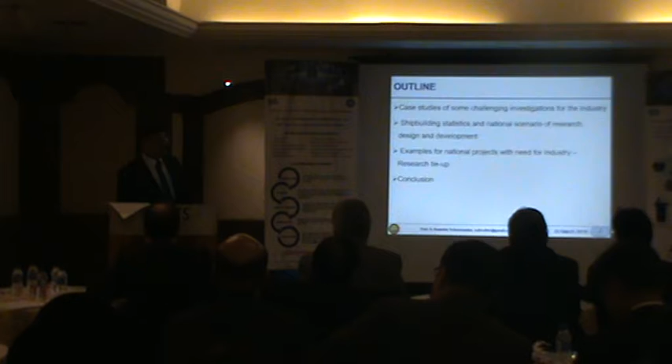So in my outline, I'm going to do two or three case studies, time permitting, and I hope it will fit within 20 minutes - I will do my best to do that. I will then touch upon the national scenario of research and maybe sum it up with the conclusions.

So the case studies I have taken, it's important to emphasize that these are all very international projects. I picked the projects where we have international clients from very developed nations and dealing with very real problems. The problems happen to be, because these are very recent, just concluded, or some are still ongoing projects,

which are related to the FPSO, that is the floating production storage offtake system - the large ships that are there in the production fields, tapping oil from the bottom and doing some primary processing and then sending them off in motherships to destinations. So, let me get on to the first case. What do you do?

Okay, yeah. The first one is how we have simulated the astern pull-out. The ship is operational in the Gulf of Mexico, and there is the tower yoke mooring system, as you can see in the picture on the right, where it shows a tower which is fixed there, and then you have the pendant and the mooring arrangement.

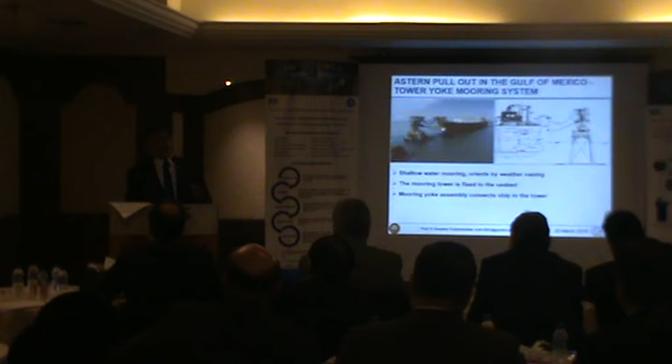I'm sure all of you are aware of it. It's a wonderful tool that has evolved over the last 25 years. But the important thing is how to use it properly, because often you may be giving wrong inputs, making wrong assumptions, or bringing in simplifications, since it solves a complex set of equations with mind-boggling numbers of millions of cells and hours of computer running. So it's not simply an animation coming out—it's hard number crunching after several days of running, which produces results that also need validation.

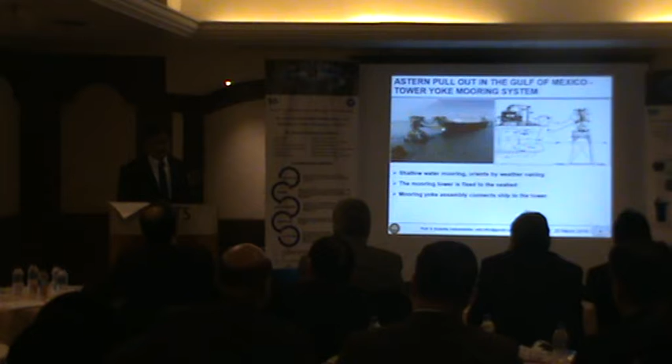So what we are showing here, I just want to describe the basics. This particular ship is in 30 meters water depth, and because of weather vaning, it will always orient itself to the line of least resistance from the wind and the waves.

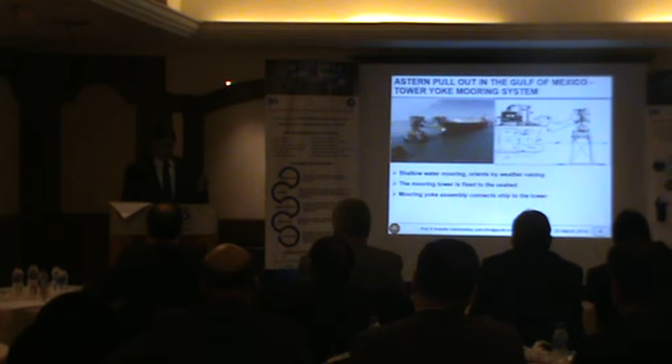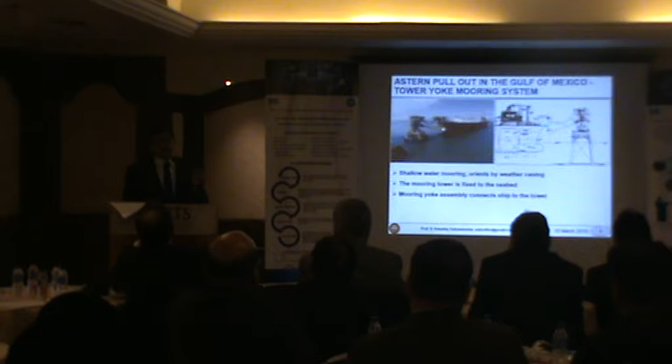And the mooring assembly connects the ship to the tower, and that needs to be detached. The detachment comes by exerting the astern pull, which, if strong enough—in this case calculated to be 70 tons—so if 70 tons of astern pull can be obtained from the propeller within the available engine power, then it can detach. So we are simulating that.

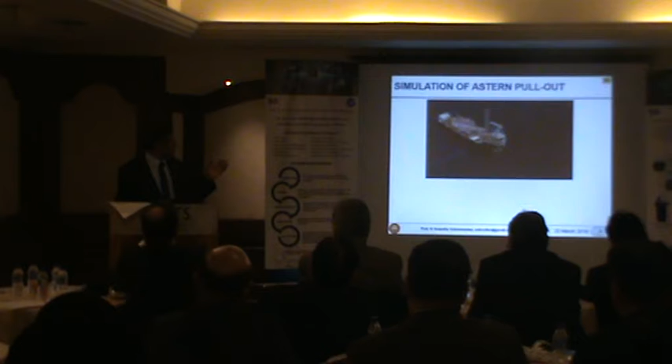This is simply an example of what weather vaning means—as the wind blows from one side, the ship will orient itself. That's what naturally happens. But when it goes beyond a limit, we have to do the astern pull out.

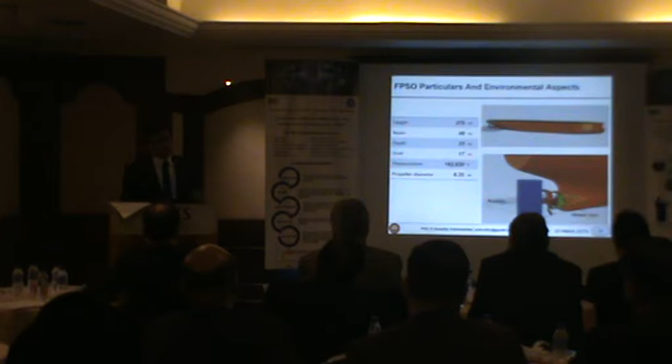So this is the modeling part of it. I'm just showing the very superficial things in the simulation, as we call it. Here you have the size and form of the ship, and you need to simulate each and every detail there. In this case, besides the rudder, there is the propeller and the Mewis duct. The Mewis duct is a device which will homogenize the flow to the propeller and improve its efficiency.

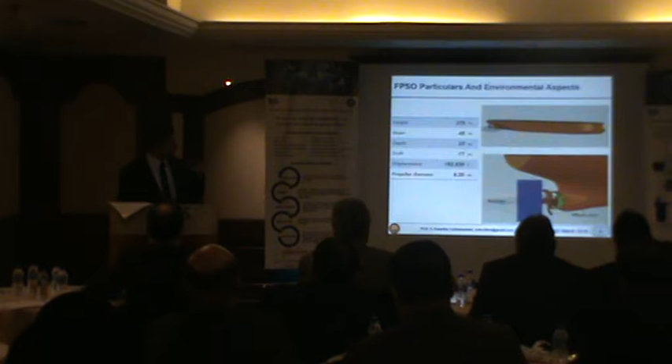So all these have to be simulated, and next is what comes out of the number crunching. Typically, we use these commercial Reynolds averaged Navier-Stokes equation solvers. The method used I have put there.

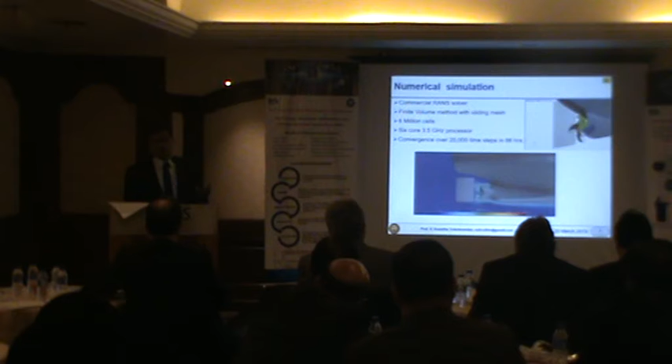There is a complexity of making the propeller turn within the domain, what we call the sliding mesh—the millions of cells that are used, just the description of the system where it uses 6 cores. In fact, people use even 100 core processors these days. And for one velocity simulation of astern pull, it could take as high as 86 hours.

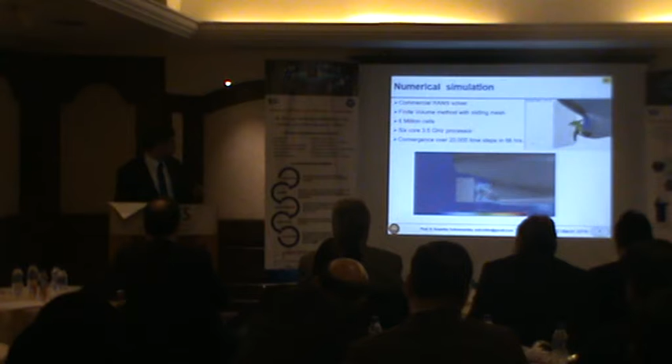So it is the result of that that you see here at the bottom—how, as the propeller rotates in the mode, the flow takes place, and then you derive the thrust out of it.

Now this is simply to say what results come out of that, and as I said, we have just delivered these results to the client, and we have verified that it is possible to do it. It is simply an example of how a very complex problem could be resolved.

Mind you, to handle these programs, to reach a validation stage, to have a degree of reliability, it takes months and sometimes years. This particular project we have been doing for the past few months. But what I mean is it requires a lot of experience and insight, so that somebody can trust the numbers that you give.

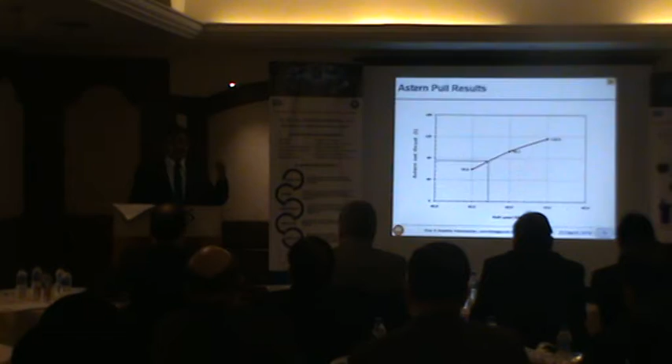So it's just one aspect of how industry and academia or research institutes need to work together. They are the experts in handling the ship. We, again, with humility, have the knowledge of the fundamentals to be able to resolve the problem.

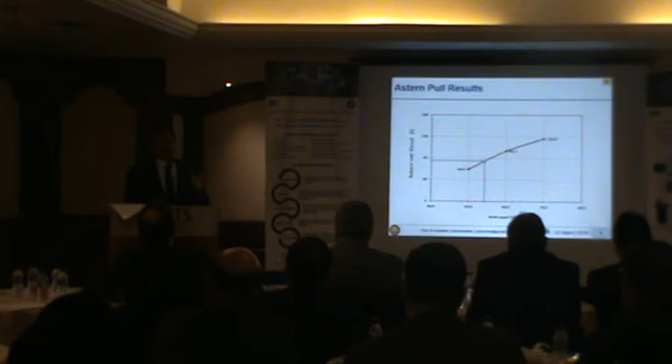And this is the very basic aspect that one has to keep in mind when we talk of research. I say this because, on an average in India, research is usually taken to be something useless. I say this because people think, oh, he is doing some research.

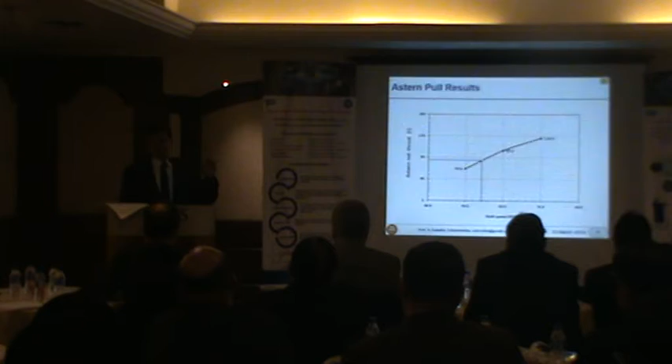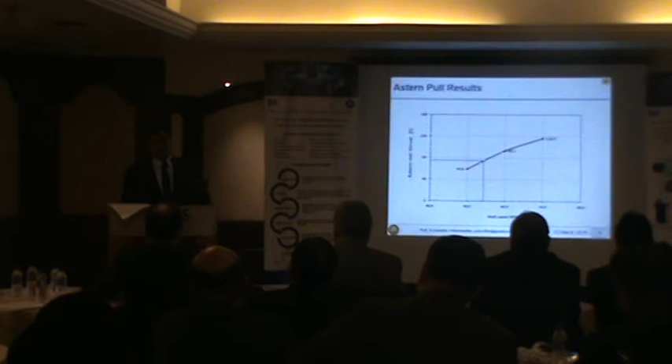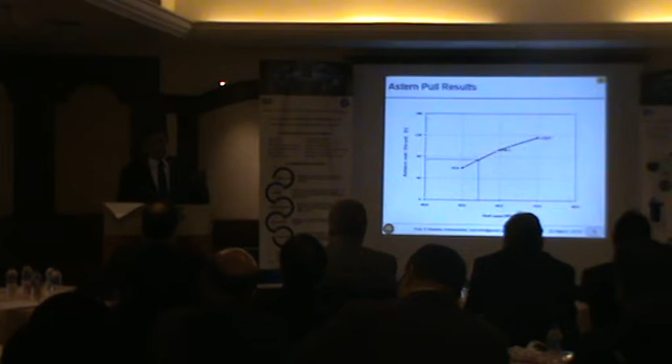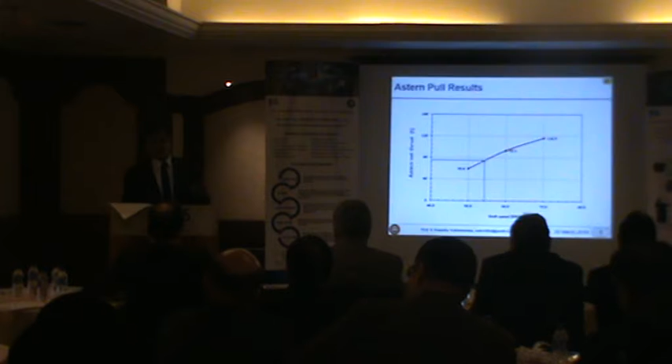I understand why they say so, because they feel what is tangible and what is being done is the real thing, the other thing is all in the mind and on paper. Maybe at higher levels it is not thought so, because this affects how we look at it in India. We need to cultivate true understanding, belief, and mutual respect, to learn to solve our problems. Research is not something exotic or meant only for a certain level of people. Research could be generated almost everywhere, every shipyard, every design process. I'm just trying to bring that out as an example here.

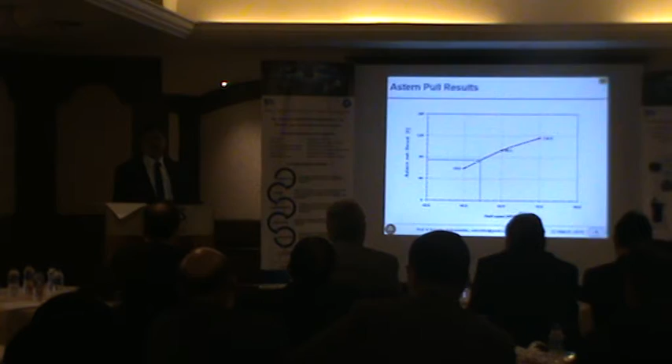This graph shows that at a propeller RPM of approximately 55, this engine's propeller, absorbing 14,000 kilowatts of power, can deliver 70 tons of bollard pull to pull the ship out.

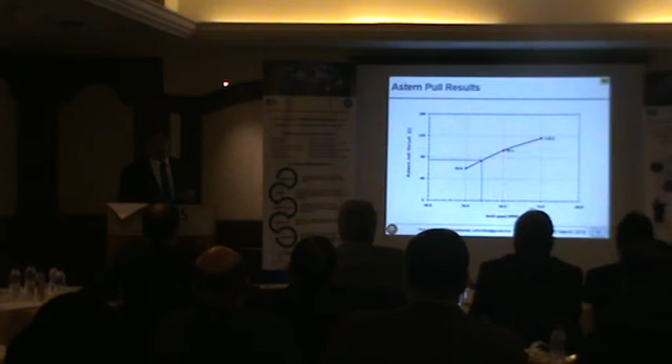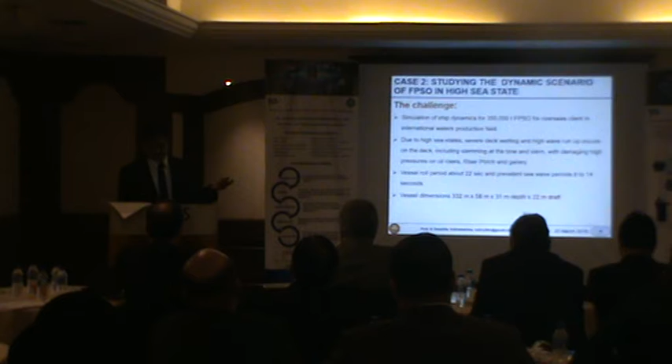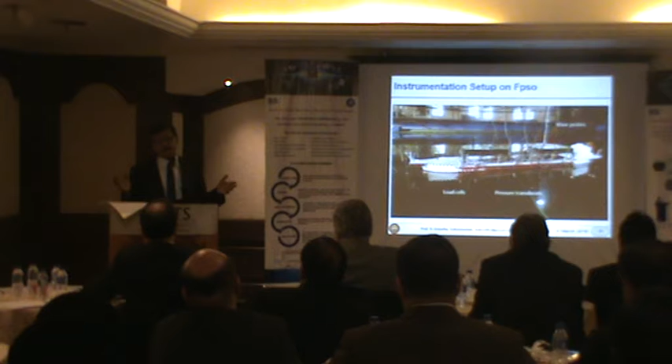This is what we have actually physically done. This is not simulation, this is physical simulation, in what we call the wave basin facility, a laboratory-conditioned system where we recreate the sea, and the ship has to be made to a model scale. In this case the model is 5 meters long, because the ship is a 330,000 ton displacement vessel with a beam of 58 meters, a depth of 31 meters, and a draft of 22 meters. You are seeing the freeboard here, representing 9 meters.

You have to understand the problem here. What you see on the side of the ship, the red structures, are called the risers, for taking oil from the bottom. This ship has a peculiar arrangement where the risers are on the side, with the riser porch on the lower portion and the riser gallery on the upper portion. All these structures are subjected to the vagaries of the sea, and experience shows many of them getting damaged or thrown out. This study came out of the necessity to understand and find the forces and pressures they are subjected to when big waves run up on the deck and impact these elements, so the design can be handled correctly.

You can see the maze of wires and the number of instruments used - more than 20 transducers, a number of pressure transducers, load cells, and what we call run-up probes to measure how much water rises over the deck every time the big waves splash. This is an actual event taking place there all the time.

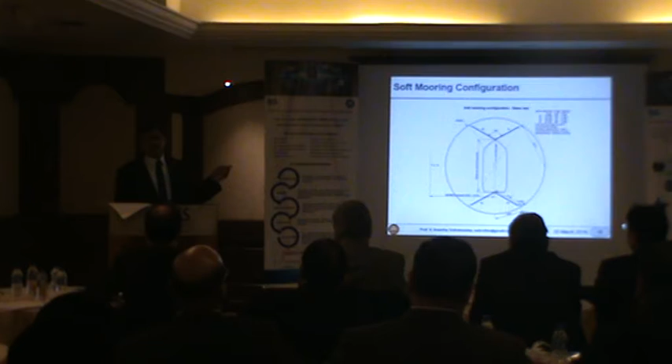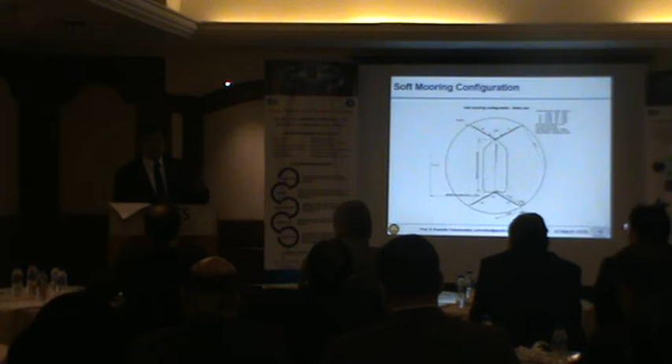There are also requirements that when the ship is out there, you need what is called a soft mooring system - I won't describe more of that. It allows the ship to execute its oscillations without interfering with the natural period of those oscillations. It should not be invasive, yet it should still keep the ship in position, otherwise it will drift away, which is not a realistic solution.

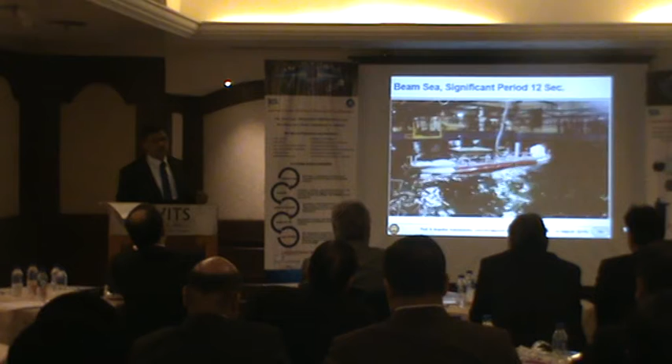Here is the video showing the actual generation of waves of sea state 5 or 6, done in computer-controlled mode, and you can see how the waves get tossed up. Of course this is a model so the period won't relate directly, but there's a way of scaling it up using what we call Froude's law - let's not bother about that now. What we need to see is that in such a condition, every time a wave is tossed up, a few meters high waves go over the deck.

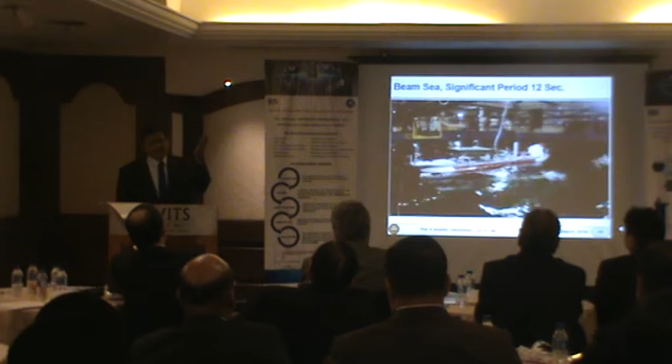And therefore the dynamic pressure can be as high as 12 to 15 bar. You can imagine the impact with which it slams on the structure, and that is also why many of them were getting damaged and thrown around.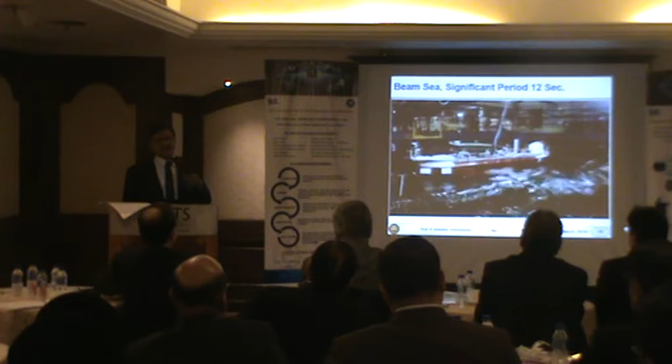If the experiments are carried out well with due diligence, the preparation of the model takes months, because it is supposed to simulate exactly the way the ship behaves. That means your mass distribution, your mass moment of inertia characteristics, your GM, all these things, and also the most important deck structures, all have to be simulated, because they are all going to play a part in the results you get.

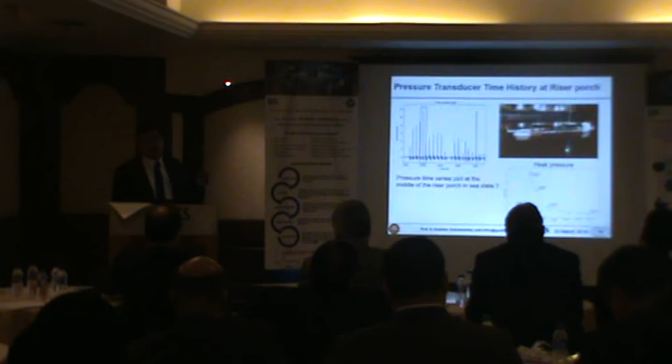Here are some of the results, just typical to show. You can see how the pressure shoots up. All those vertical lines are momentary high peaks of pressure. That means at an instant of time, there is a very high pressure peak, and the right side lower bottom figure just shows that although it looks like a single peak, there is a high peak and then it quickly descends to a low value.

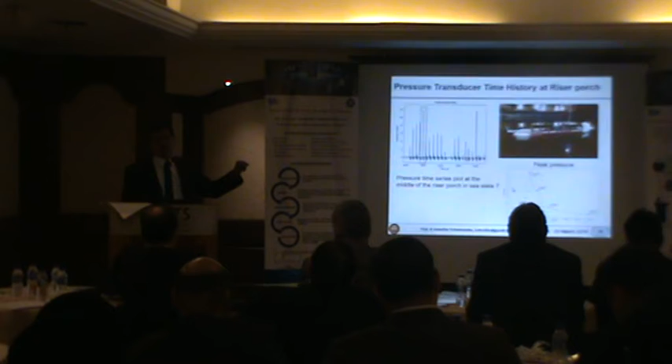So the question is, can you really design for this 15 bar pressure? If you go by structural principles, you will have to have very high scantlings. I can only say this is analogous to if somebody gives you a slap - momentarily you face a high pressure, but that didn't kill you. Still, there is a possibility the structure can take that pressure momentarily. So the design principles are different. What is the average pressure you get over the period, and can it sustain that? Because otherwise it becomes impossible to design the structure if you report this is the pressure you are getting.

You understand? So there are a lot more ramifications in these things, but the interesting thing is this experiment gave us wonderful insight into something which we ourselves did not expect.

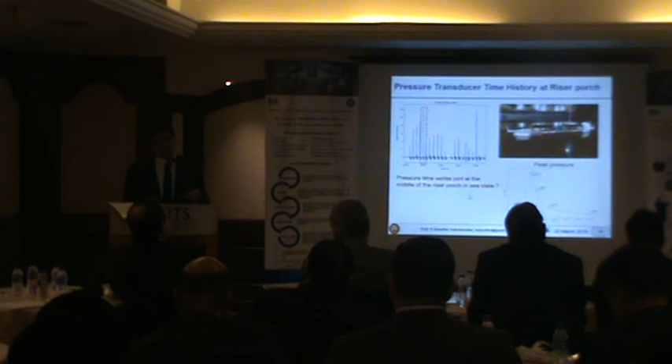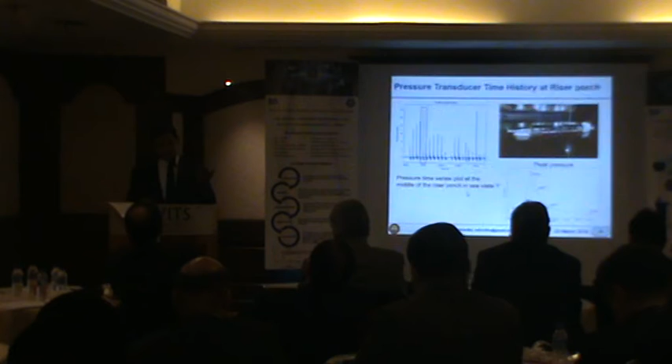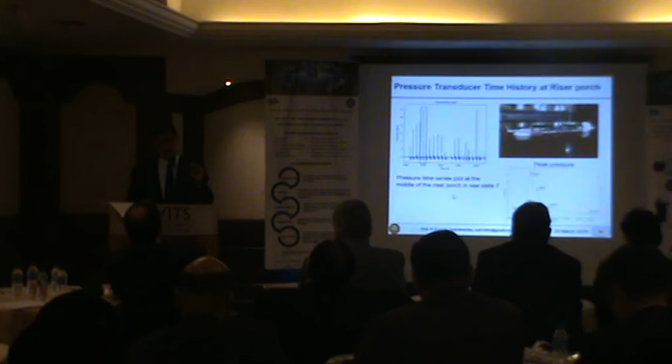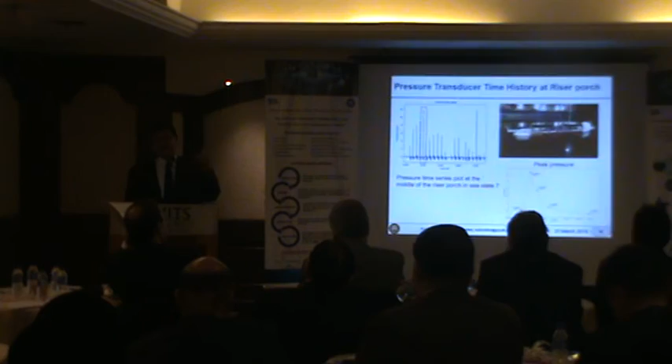But the most important thing is these tests are a replication of something already done in some European tanks, and our client did not have confidence that it was exactly right, which is why they came to us. So we take it as an honor and a challenge that we were able to replicate that, and they are happy with the kind of results being verified and validated in our facilities. That is one of the biggest gains from these kinds of projects and exposures - not only our own self-belief, but also the belief of others that we can carry out high-level jobs with a degree of reliability.

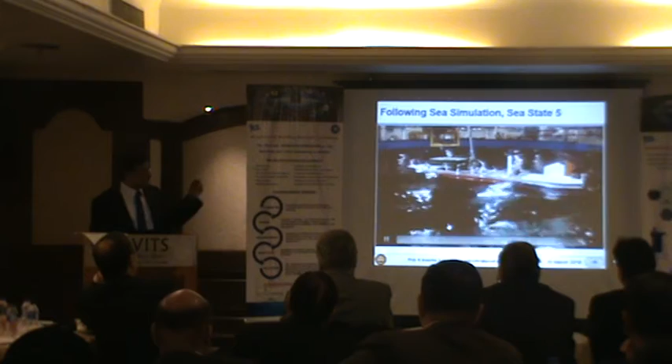This is again because it is a following sea, so we had to recreate the sea conditions in head sea, beam sea, oblique sea, following sea, many things. This just shows what happens, and depending on the orientation, you could have severe slamming in the aft region, in the bow region, and sometimes at the middle region also, as you can see happening here. You can imagine when you enlarge it to the real ship scenario, how frightening it could be. It's a very phenomenon that we are actually creating there.

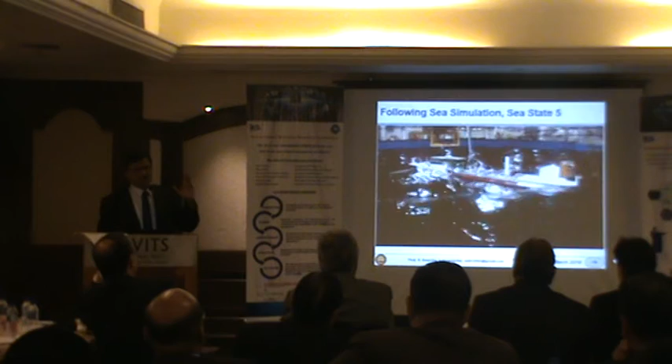Now that you have seen this video, I want to tell you the salient conclusions we could gather from this. Of course, the high dynamic pressures, and the significant amount of shipping of green water that does occur on the structure, which obviously cannot be modeled by the mathematical tools we have in hand. Because even CFD with two media, that is air-water interface, takes very complex modeling to actually physically generate. It is done, but only such physical tests can actually capture it.

Therefore, as I told you, high pressures have to be assessed. The last point I'll bring in is, in case somebody in the audience feels they did not see any rolling of the ship, it has to do with the periods - because the periods at which the bad waves or prevalent waves occur in that region are highly delinked from the natural roll period. Being a big ship which has a high roll period of 22 seconds, and the prevalent wave conditions having an average period between 8 to 12, 14 seconds, which is why there was not so much roll in that case.

This is the last case I am going to present, because this is a unique development which we have performed and actually patented.